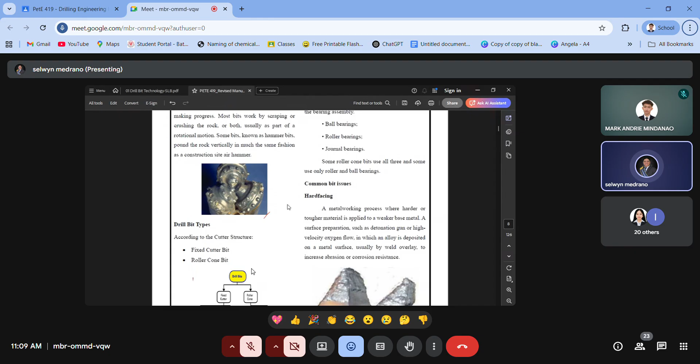So we have here the family tree of the drill bits. I'll be showing you a photo of each type on this tab here, but first I'll ask permission from Sir Arnel.

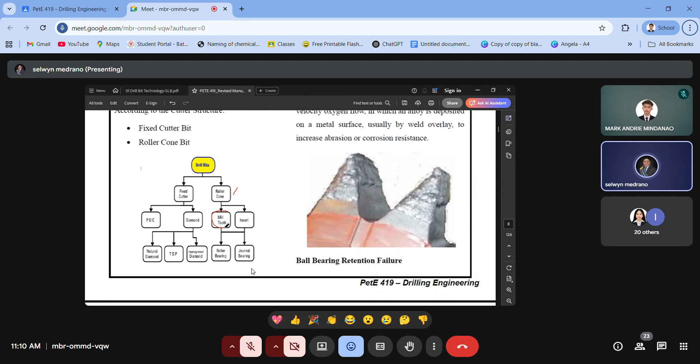I'll be showing you some of the types of drill bits. If you remember from our manual, the first type given in the PowerPoint is a milled tooth bit under roller cone. This is the roller cone classified as milled tooth, and that's what it looks like - you can see there are milled tooths that are triangular in shape.

Then we have here the insert bit, the second type of roller cone. In terms of the structure of its teeth, we have the inserts, which are circular in their physical appearance - circular, unlike the milled tooth, which is triangular in shape.

The material used for these inserts is tungsten carbide, which is technically an inorganic compound - literally tungsten having a reaction with carbon in order to bind and form this particular material.

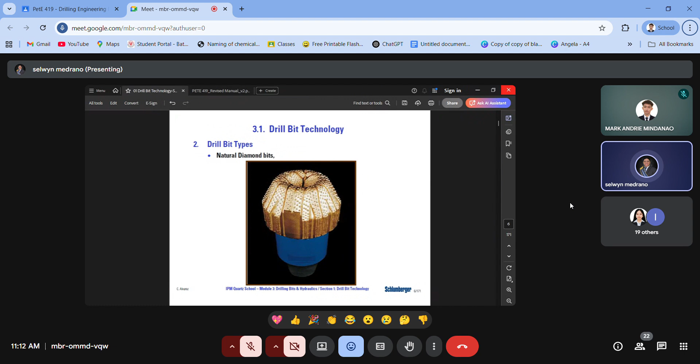Then we're done with the types of roller cone bits. Now we have the first type of fixed cutter bit, and basically for fixed cutter bits, the majority of all the types are made of diamonds.

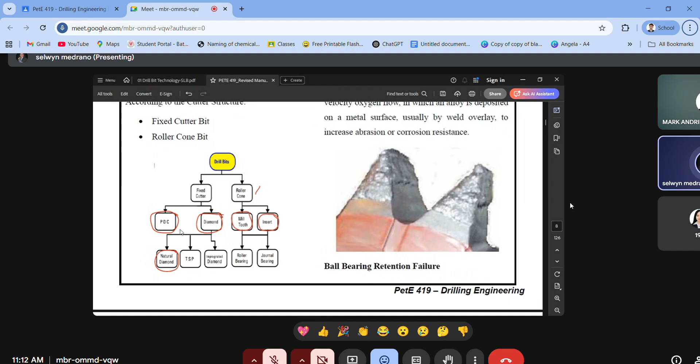The next one we have is the PDC. Under our family tree, PDC is a lone type along with diamond on the second layer of the family. This is the look of the PDC. The acronym PDC means polycrystalline diamond compact bits. As you can see here, the teeth or compacts, the black ones, are not directly facing the formation. It is somehow slanted, its orientation.

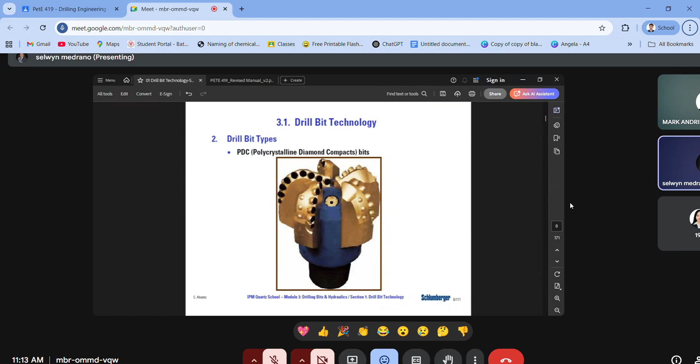What do you mean by HPHT wells? Anyone? What do you mean when we say HPHT wells? Yes, Mark Andrie.

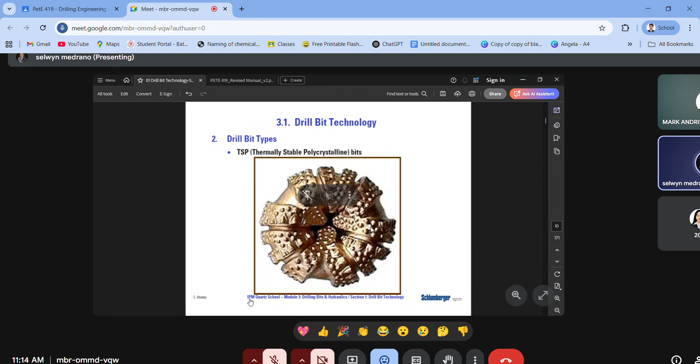From the term high pressure, high temperature wells, these are wells where the pressure and temperature are not common. It's a bit higher compared to normal formations or normal wells. So basically, this particular type of bit is applied to those wells in order for it to withstand the high pressure and high temperature condition in our well. Because if we use a normal type of bit, it can affect the performance of the bit. It can also affect the integrity of the bit, making it more susceptible to wearing or to some types of drilling failure mechanism. Later on we'll be discussing those drilling failure mechanisms.

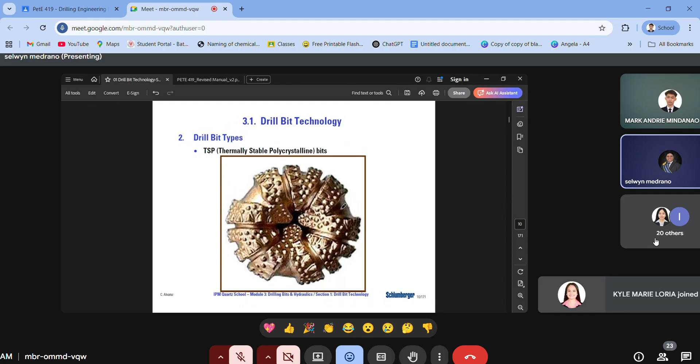Next, this is another perspective of the TSP bits. Then lastly, we have the last type, the impregnated diamond bit. For the impregnated diamond bit, we have this one. If you look at it, its appearance is really different. You can clearly see the differences in their physical attributes or physical structures.

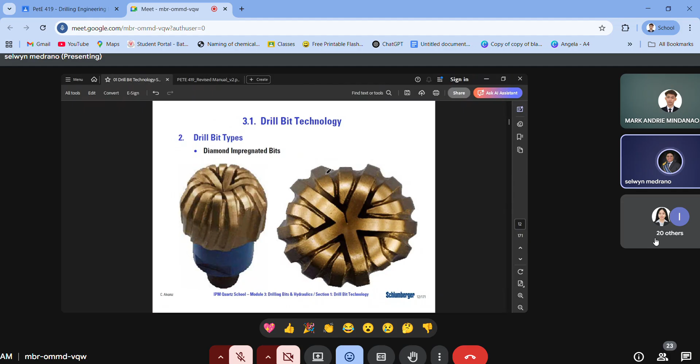So no need to explain further on their differences. These are the families of the bits. One example, for instance, is the PDC bit, which is considered a fixed cutter and also a drill bit. As you can see, you can already tell what type of bit it is in terms of its cutter structure. Okay, let's proceed to our manual.

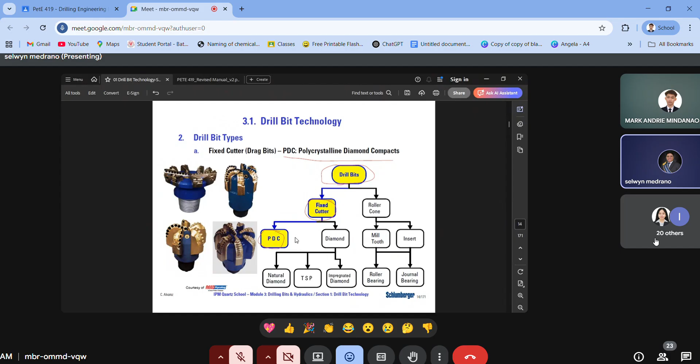Let's go back here and discuss this one. We have here a bearing assembly. What do we mean by bearing assembly? A bearing assembly is a device that sits between the cone and its attachment to the legs of the bit to reduce the force of friction, since our bit is subjected to friction because it is in contact with our formation. So the friction can produce heat.

Large amount of heat, and this heat can affect, as I mentioned earlier, the performance of the bit. Along with drilling fluid or drilling mud—if you could remember during our discussion, I mentioned that one of the purposes of drilling mud is to cool the bit, along with its lubrication or lubricating property. So along with that, along with the bearing assembly and also the drilling mud, these serve the purpose of reducing the friction.

Then in the case of the drilling mud, it is more of a preventive measure, because of course, we can't avoid friction between the bit and the formation. So the tendency is that our drilling mud serves as the absorbent—it absorbs the heat itself. Because in terms of the components of drilling mud, majority, almost every time, it is water-based. And water, we know, has a high specific heat, so it can absorb an immense amount of heat.

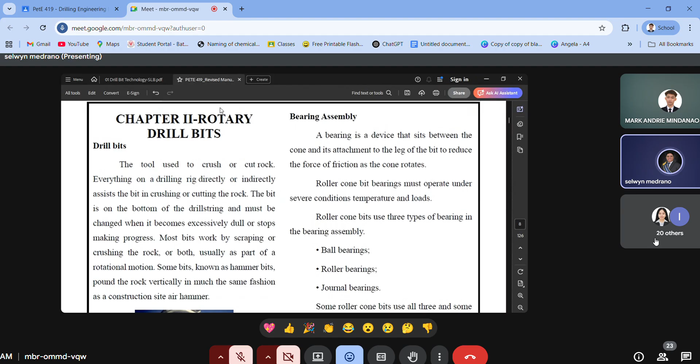Okay, so our roller cones use three types of bearings: ball bearings, roller bearings, and lastly, journal bearings. But in our family tree, you can only see two types, the roller and the journal, because the ball bearing is somehow a subordinate of the roller bearing. Later on, we'll see what the differences are between the two major types, the roller and the journal.

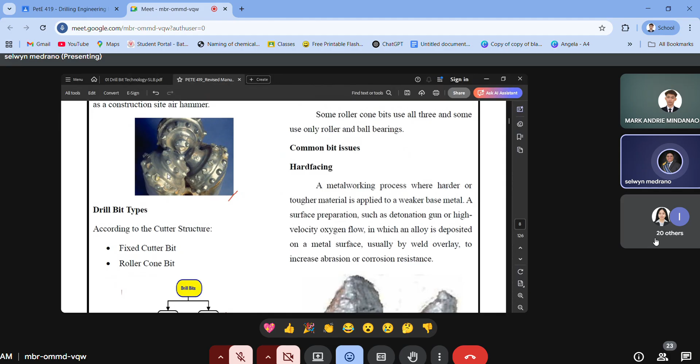For this roller cone type of bits, on the right side of our picture, we have common bit issues that we face during drilling operations. One is the hard facing. So what do we mean by hard facing? Basically, there is a harder material, and since the harder material and the softer material are in contact, the tendency is that the softer material will deteriorate.

So nagkakaroon po siya ng hard facing. Since there is a presence of hard material, for example sa ating case, yung softer material natin, let's say, is the bit, then the harder material is the formation. When we encounter hard formations, ang tendency is magkaroon ng hard facing doon sa ating bit. So nagiging ganyan siya, ito yung itsura niya. One of the possible causes nito, syempre, hindi na-consider yung hard formation dun sa ating reserva.

Actually hindi naman siya maiiwasan kasi since our formation is heterogeneous in general, we are considering only the majority or yung major parts niya, for example, yung ating reserva, karamihan is soft formation naman, however, may mga parts na considered as hard formation. Since in the design of the drill bit, we are to use yung mga bit that is designed for soft formation. Kasi kapag hard formation yung ginamit natin, ang tendency is it can affect or it can slow the drilling. Kasi soft formation, in terms of texture ng formation, sticky po siya. Tendency, it can stick through between the teeth of our bit, so it can slow the drilling, and once the drilling is slowed, yung ating ROP will also be slowed, syempre it can affect the drilling operation time.

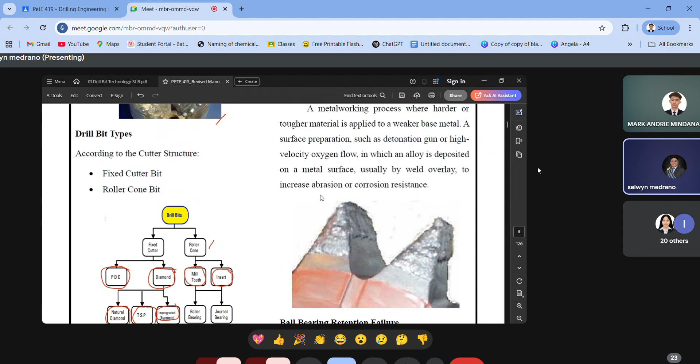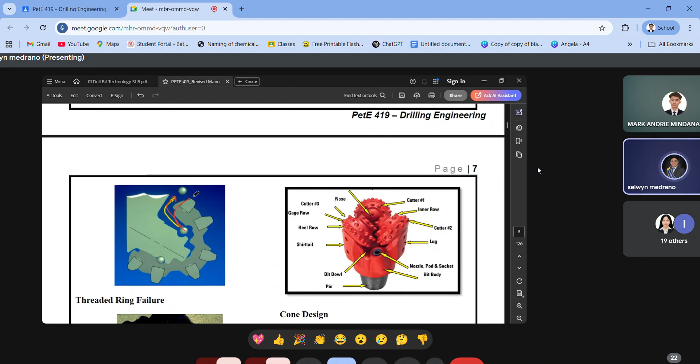Another common bit issue that is encountered is itong ball bearing retention failure. So tendency na aalis yung ball bearing doon sa mismong ano, so yun lang yung simple explanation niya, due to external forces that is acted upon dito sa ating bit.

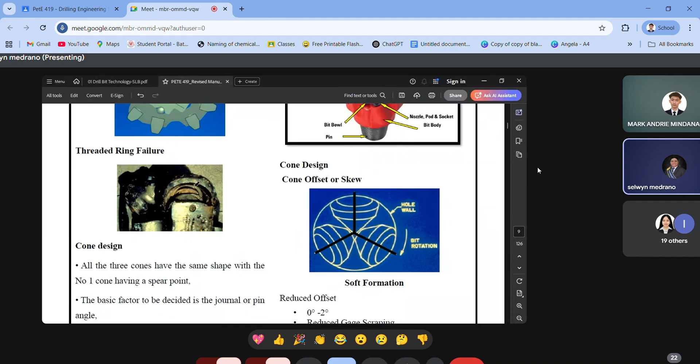Next, we have the threaded ring failure. So yung ating ring, yung ring structure dito, literal na nag-wear siya, napudpud siya, literally, and that causes it to fail.

Okay, for the cone design, yung mahalaga lang naman dito is yung journal angle. Yung journal angle daw po is the angle that is formed between the axis of the journal and the horizontal. So kung yung journal natin is nakaganon, so the horizontal is this one, ito yung angle niya, let's say it is angle theta. Yun nga natin yung journal niya, yung angle niya, let's say yung journal is somehow slanted, so ito yung angle, yung journal angle na tinutukoy.

Okay, for roller cone bits components, we have this one. I won't be specifying each component, kita niyo naman siya sa picture if it's not clear on your module or on your end, so this one is the clearer version of it for you to see.

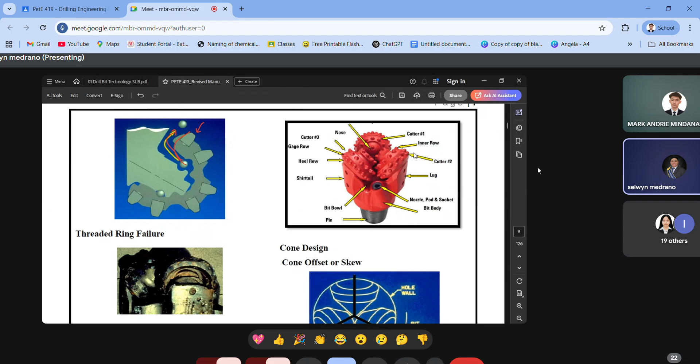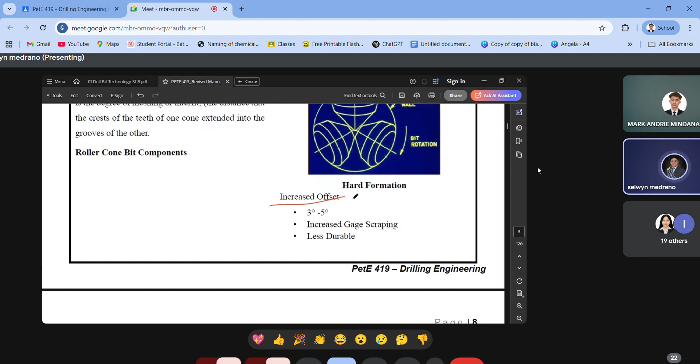Okay, for the cone design, we have a reduced offset and increased offset. This reduced offset is basically applied for soft formation, and this increased offset, wherein yung offset po natin is 3 to 5 degrees, is applied for hard formation. Now, based on the given description here, as you can see, syempre for reduced offset, somehow it is more durable since it is designed for soft formation, however, in terms of the pacing of the drilling operation, it is slower.

Bakit? Kasi since it is soft formation, malambot yung formation natin, in terms of the texture or yung mismong physical attributes ng ating formation, siya ay malambot or sticky in nature, so ang tendency, it can reduce the speed or the rotary speed of the bit, which causes it to slow the drilling operation.

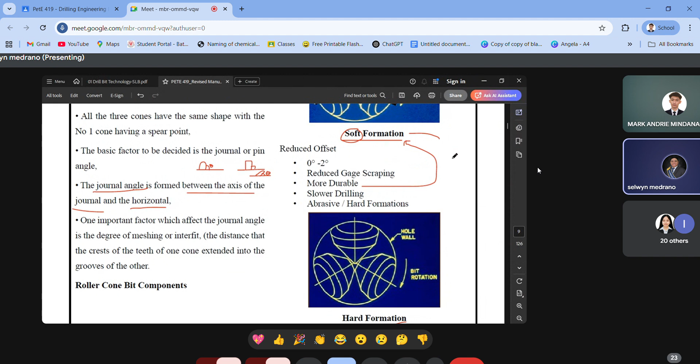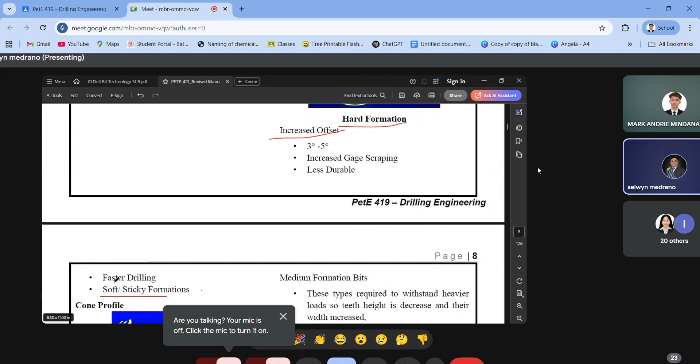Okay, why is it ano for... but baliktad? I think this is baliktad pala. In terms din naman sa increased offset, baliktad lang ito kasi this one is for the soft. Increased offset, ito yung sa soft and sticky, faster drilling po siya, however, less durable. Ang nangyayari, there is... wait, I can't think of the right term for that. Ang nangyayari, kaya siya nagiging less durable, syempre.

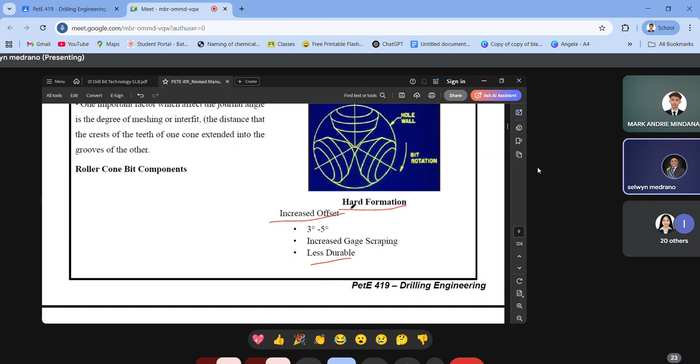Yung mga soft formation, are you familiar with conglomerate? Yung conglomerate, in a soft version, siya ay merong mga foreign material that is present on that particular formation, and syempre, yung mga foreign materials na yun, generally yung material na nagse-sement doon sa mga foreign materials is soft in nature, but yung mga material itself, sila po ay hard. So ang tendency, mas maraming harder materials, but in terms of its size is smaller, mas maraming na-encounter na ganun.

So, the tendency is the bit becomes less durable because they've encountered more of those types of materials - the small, hard ones. But generally, it is soft formation. There are just some small materials present in the formation.

Okay, for the cone profile, we have here the round and the flat cone profile. Later on, in the IADC bit classification or our nomenclature for bits, we'll be discussing this one - the round and the flat cone profile.

For flat cone profile, basically it is more applicable on hard and abrasive formations. And of course, with hard and abrasive formation, the drilling pace is slower, but it is more durable.

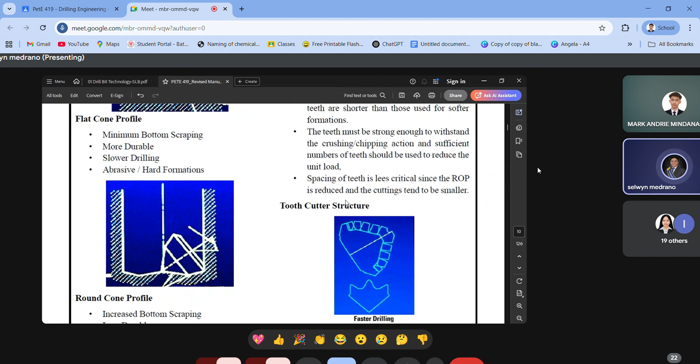But on the other end, we have the round cone formation profile. This one is designed for soft and sticky formation. Since it is soft and sticky formation, it could be less durable. However, it can drill at a fast rate.

Okay, we have here the cutting structure. For the cutting structure, we identify our formation into three in terms of hardness - soft, medium, and hard. This medium is pertaining to the hardness, not the size. Since we classify formation into three, we also classify the bits designed for those specific types of formation into three as well.

So we have bits designed for soft formation, bits designed for medium formation, and bits designed for hard formation.

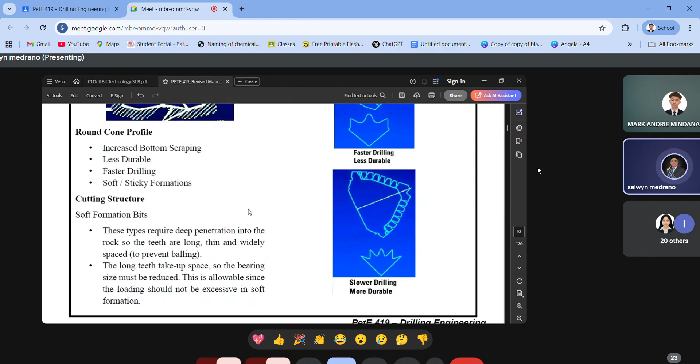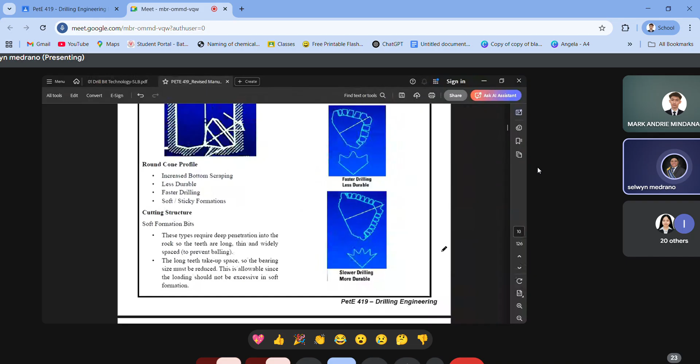Okay, in terms of the tooth cutter structure, can someone give me a conclusion with regards to this image here, our two images? I'll be calling from the index card. Is Cyril here? What can you infer from this particular image on the right side of our presentation?

Where is Cyril? Hello, sir. What can you infer from this particular image or diagram? About this tooth cutter structure, sir.

Okay, what can you say about it in terms of - isn't there a description written below each photo?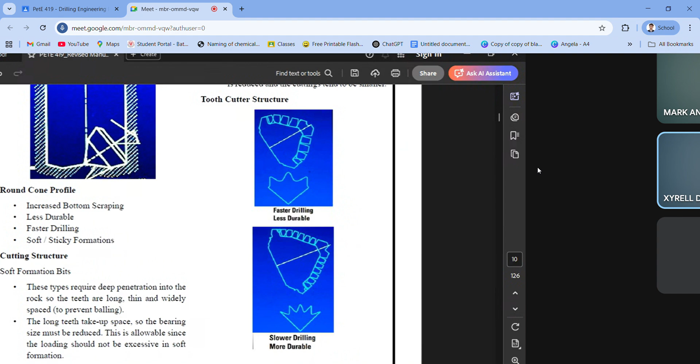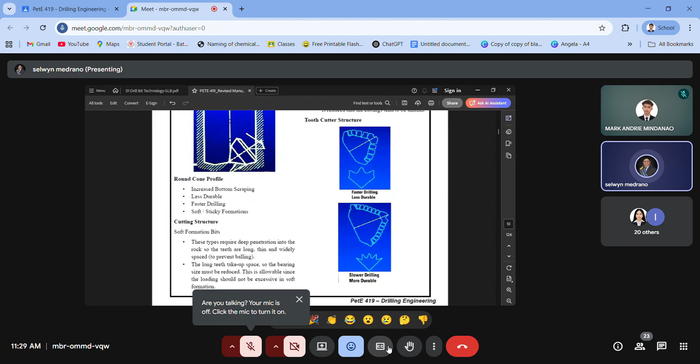Okay, so what Cyril said is more of an input. I need a conclusion with regards to Cyril's input. He already mentioned the obvious there. Let's have Aina Nicole.

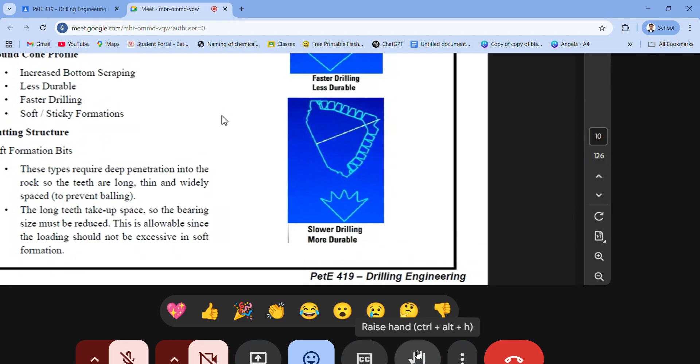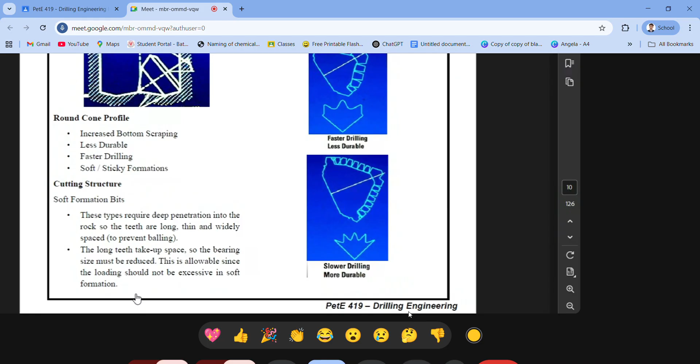Can anyone help Aina? Yes, Sophia.

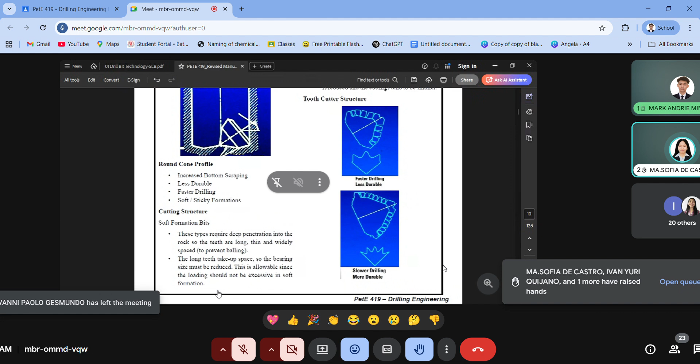Sir, based on what Cyril said, the tip is longer then sharper, then pointed, based also on the picture. So this allows it to have faster penetration. Then the sharp tip tends to wear or break more easily when drilling formation.

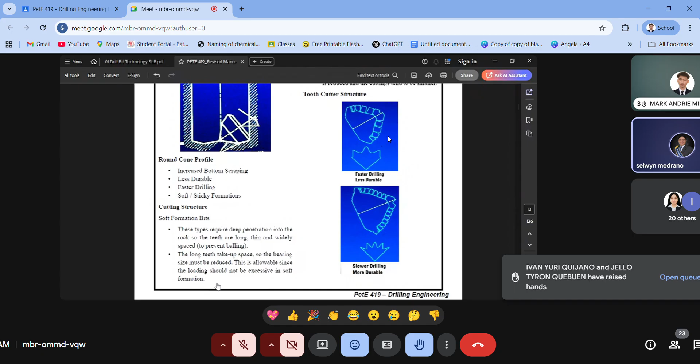Okay, thank you. So basically, as you can see, the more teeth present in terms of the frequency or quantity of teeth on the bit, it is more designed for more durable or harder formations. However, the pacing could be slow.

On the other hand, we have here a figure wherein the frequency or number of teeth is somehow smaller compared to this one. This particular type of bit with less teeth is designed for less durable formation, or in terms of being soft. However, it is more of faster drilling. Okay? Do you get the difference between the two?

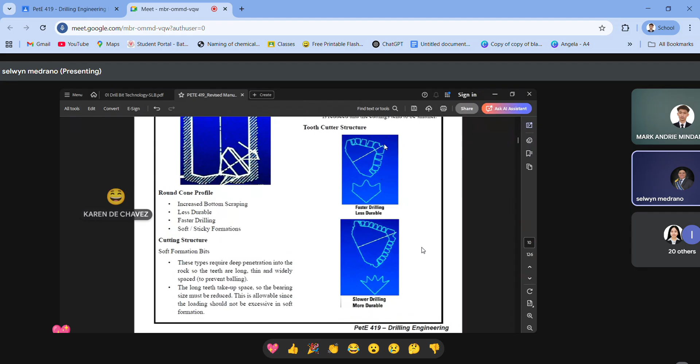Okay, so as you can see here, we have a comparison in the number of teeth on the bit. What specific type of bit is this? Based on what I have shown you earlier, I have shown you all the types of the bit. What type of bit is present here in our image?

Of course, it is a roller cone. So what is it - insert bit or milled tooth? Yes, Maria Luisa. Milled, sir. Okay, so this one is a milled tooth bit - basically, it's under roller cone.

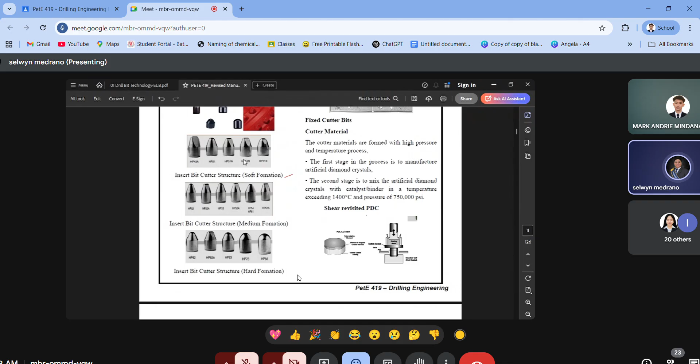Yung difference po niya, syempre, pag soft ng formation, pag haba, as you can see, medyo mahaba siya or medyo mapayat siya in terms of its diameter. Then kapag harder formation, medyo ponggok siya or maliit, then medyo wide siya in terms of the diameter, mataas yung diameter po niya. Okay, we're done with the two.

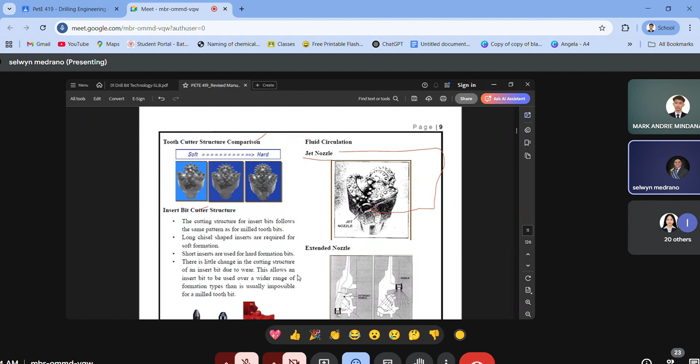Roller cone. Then we have here the jet nozzle placement for the roller cone. So the jet nozzle placement for the fluid circulation is here. Ito siya, ito yung location po niya. However, there are some bits that are designed with extended nozzle.

So what do we mean by extended nozzle? Diba, normally, dito nakikita yung ating nozzle. But yung extended nozzle, it is directly adjacent with the formation. So siya ay directly facing the formation.

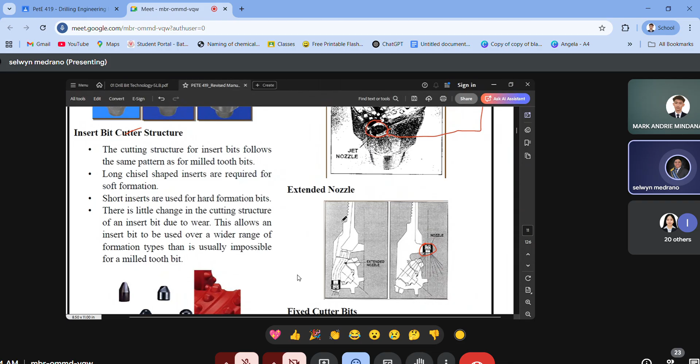So para saan ba yung nozzle na yan? Dyan po lumalabas yung ating drilling fluid and the drilling na ating nilalagay doon, finifill doon sa ating annulus or sa borehole. Okay po, clear yun?

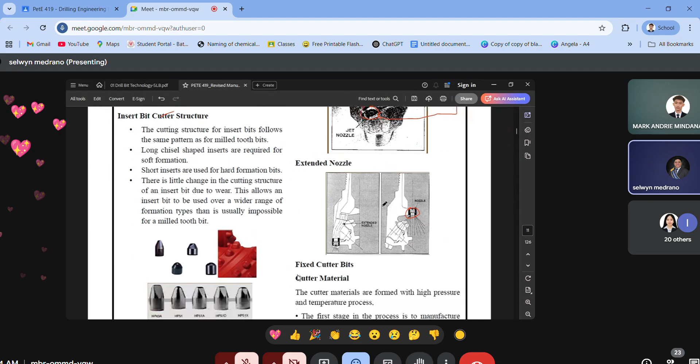Guys, with regards sa roller cone, do you have any questions? Okay, let's proceed with fixed cutter bits.

Okay, for the cutter materials, for this particular type of bit, are formed with high pressure and temperature process. So technically, these are formed, kumbaga, minomold po yung shape po niya in subject with high pressure and high temperature. So technically, these are mostly metals, and some of the materials that is being used for this particular type of bit ay inorganic in nature.

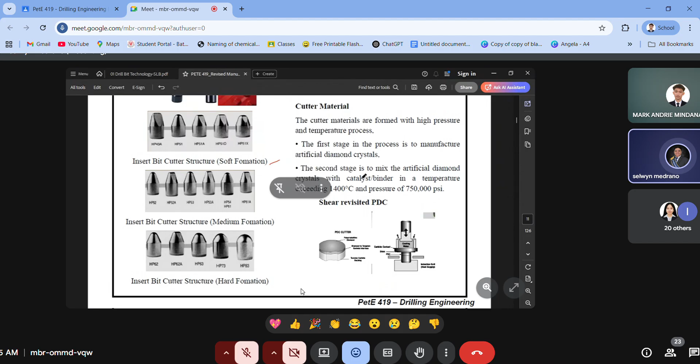So literal na nagkakaroon ng artificial making of these diamond crystals. Kasi if you could remember, yung atin pong fixed cutter bit, yung kanya pong material is diamond in nature. So in terms of the artificial diamond crystals, these are yung tinatawag nating synthetic diamonds. So we have here a shear revisited PDC, or polycrystalline diamond compact.

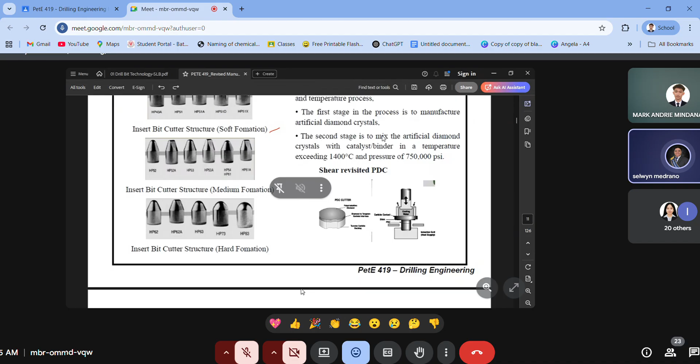So ito yung itsura po niya. And as you can see, it is in the form of different diameter. So iba-iba yung kanyang kapal in terms of the diameter.

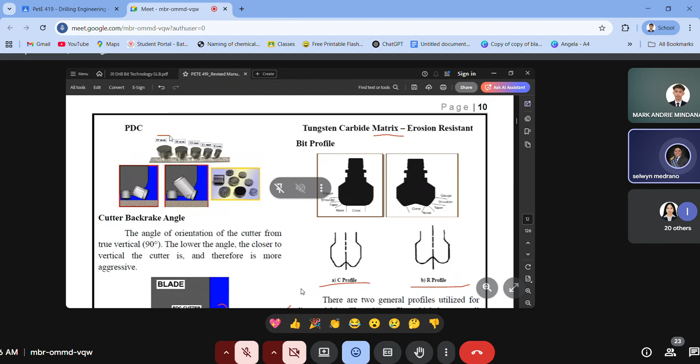And as you can see here, we are to consider the cutter back rake angle. Okay, for the cutter back rake angle, this is the angle of orientation of the cutter from the true vertical. So basically, the true vertical is this one. Hindi ko pala naalis yan.

And as you can see, the cutter back rake angle can be computed or quantified if yung ating PDC cutter is facing to the right, yung atin pong angle is quantified clockwise. So clockwise po yan. So from the true vertical, clockwise, i-measure natin siya clockwise. Yun yung cutter back rake angle natin, or the gamma.

And if it is facing to the left, just like this one, diba this is facing to the left, yung atin pong measurement ng cutter back rake angle from the true vertical is counter clockwise. Clear po? Ba't pala nang naka-open ng camera? Clear po iyon?

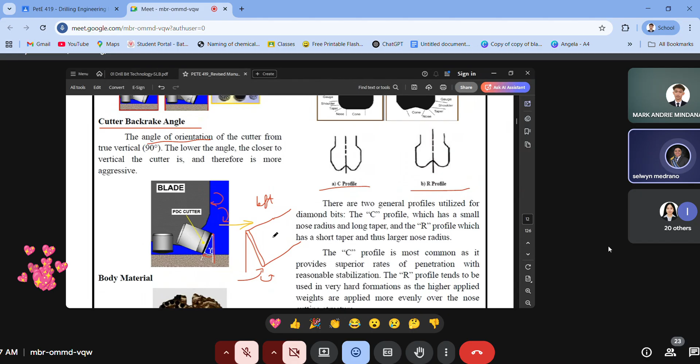Okay, so in terms naman po of the body material, yan. If you could remember, the IADC bit classification under drilling technology, di ba you have taken it last year? Yung code that is allotted for a fixed cutter bit is composed of alphanumerical code. The first one is the alphabetical element, then the last three is all numerical in terms of its element. So yung ating alphabetical part for the fixed cutter, dalawa lang siya, it's either M or S. So it could be steel or it could be matrix in nature.

Okay, so steel, so siya ay more of metal. Then in terms of matrix, more of ano siya, inorganic compound. So we have here again, ito yung types of matrix, yung tungsten carbide, one of the type of the matrix. So we have here the bit profile.

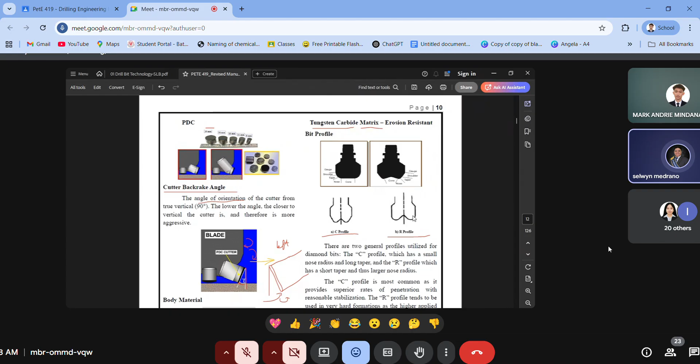Actually, I cannot see the difference between these two doon sa C and R. I mean, in terms of its relationship with the alphabetical, or yung mismong letter na dedicated for each profile. Cannot see kung bakit siya naging C. I cannot see kung bakit ito naging R. But there are still difference, no, in terms of the profile. And syempre, meron niyang effect doon sa ating drilling.

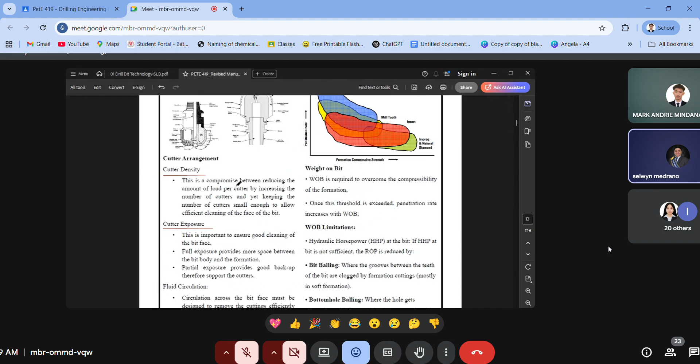Then we have here the cutter arrangement. For the cutter arrangement, it is subdivided into 3. So the first one is the cutter density. Then we have the cutter exposure. For cutter density, if you would remember, this one is yung parameter na ginamit natin upon dealing with the calculations under this one, diba, if you could remember.

Then for cutter exposure, more of yung exposure po niya with the formation, depending on the angle, and how, yung in terms of the surface area that is somehow adjacent with the formation. Then we have the fluid circulation. So for fluid circulation, ito naman ay paulit-ulit na natin sinasabi, yung interference ng ating drilling fluid and drilling mud with our drilling bit. So most probably, there is kumbaga, there is an effect in terms of its mechanism.

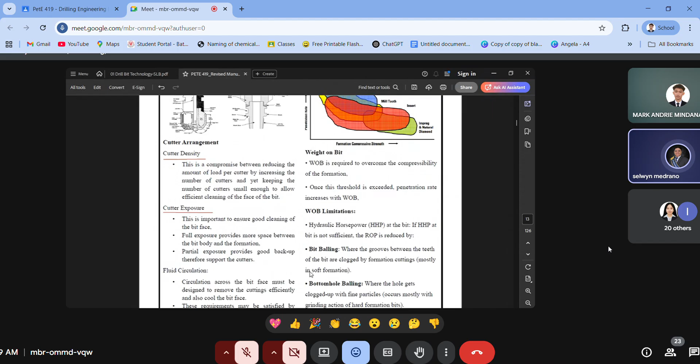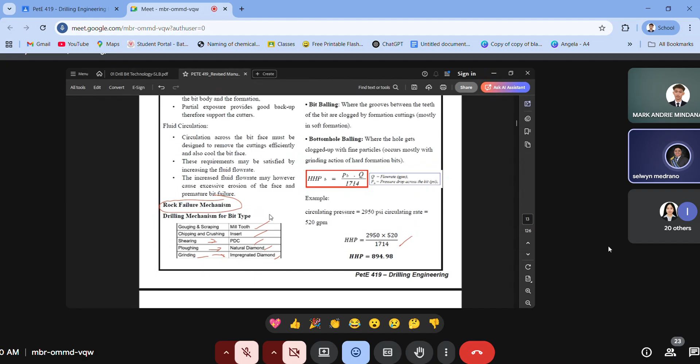Okay, then lastly, we have here the rock failure mechanism that I mentioned to you earlier. So we have different rock failure mechanisms for each type of bit. I won't go through each one individually, but we have ploughing for natural diamond, for PDC shearing, and so on. The PDC is shearing because, if you remember, the PDC is somehow slanted, and shearing forces are more of the forces meeting each other. In terms of the relationship between the formation and the bit, it creates a shearing force or shearing mechanism.

Then we have here the bit application spectrum. I would like to ask some of your insights about this particular graph relating penetration rate and the formation compressive strength. Let me call on Giovanni. What can you say about this bit application spectrum?

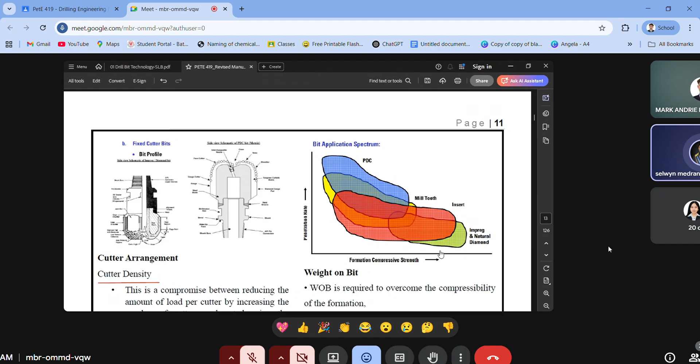Okay, where is Giovanni? What can you say about this particular graph relating the penetration rate, the formation compressive strength, and also the type of the bit?

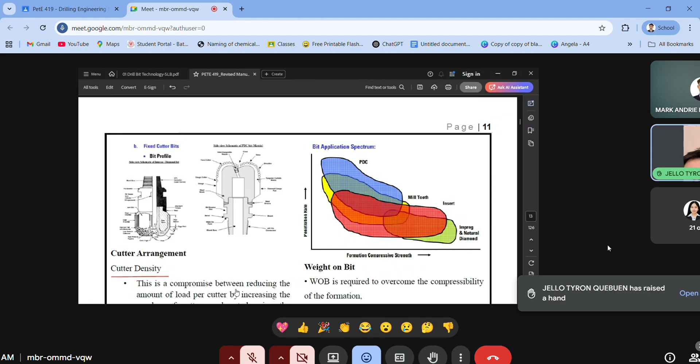Yes, Jello. Audible naman po, sir, yes. I'd like to add to what Mr. Gismundo said. Let me highlight the colored regions in the graph: the PDC, mill tooth, insert, and the impregnated natural diamond. Those regions represent where each of these bits is best utilized.

For example, the PDC has a high penetration rate but a lower formation compressive strength, meaning it is best for soft to medium formations. Then for the impregnated and diamond bits, since they are at the highest point of compressive strength but lower penetration rate, they are good for very hard formations.

Okay, thank you for that insight. That is the specific insight I was looking forward for you to notice. But on a general note, as you can see, the relationship between the penetration rate and also the formation compressive strength has an inverse relationship. You can already see that there is an inverse relationship. What do I mean by this inverse relationship?

As you can see, regardless of the type of bit we use, as the bit is designed for a harder formation, meaning as the formation compressive strength increases or the formation gets harder, the penetration rate becomes somehow limited or lower in ROP. On the other end, this PDC is only designed for soft formation, but in terms of penetration rate, it is high. Do you get the inverse relationship between these two?

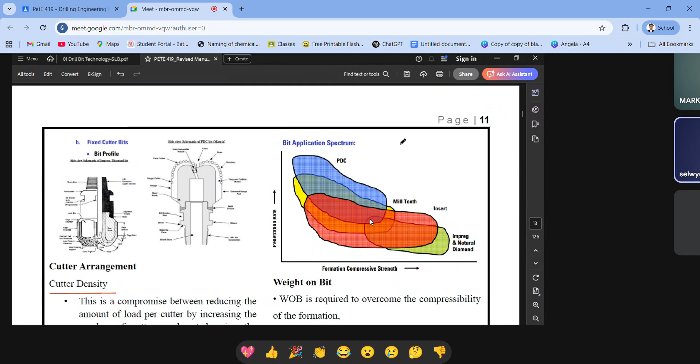So, along with these parameters, we also have weight on bit, which I have already discussed with you. Weight on bit is required to overcome the compressibility of the formation, because if not, the tendency is that the teeth will wear out. In terms of the compressibility of the formation, our bit's weight on bit, rotary speed, and rate of penetration in general will withstand the compressibility, or should be higher than its compressibility in order for it to be crushed. Once this threshold is exceeded, the penetration rate increases with the weight on bit, so there is a direct relationship between ROP and WOB.

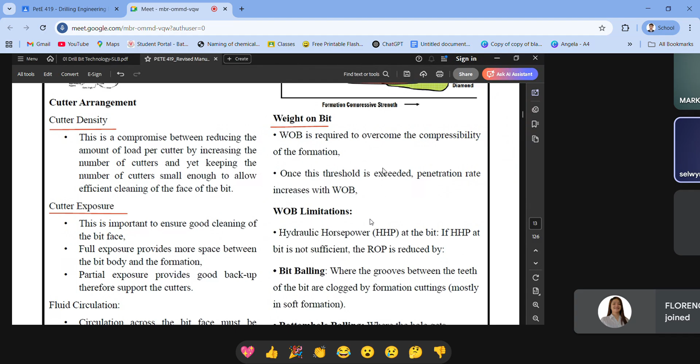However, there is a limitation in terms of the HHP, or hydraulic horsepower, of our bit, which we have already discussed. If our HHP is not sufficient or is a bit low, our ROP is reduced. Meaning, when the ROP is low, it will require us more time to drill a particular formation, and this will lead us to a conclusion that our operation becomes costly because it takes longer to drill.

So, along with that, when our ROP is reduced, what are the causes? We have two possible causes: the first one is bit balling, and the second one is bottom hole balling. So what is the difference between these two?

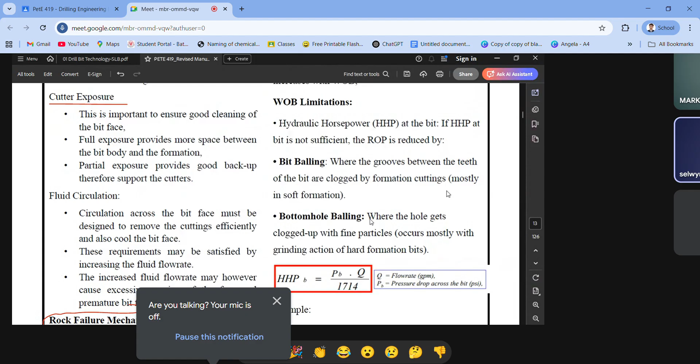For bottom hole balling, if the formation is hard in terms of hardness, its particles are fine in nature. One example is shale, which is considered one of the hard formations, and shale's particles are fine. When shale is crushed by our bit, these fine particles tend to clog our hole, creating a hindrance which will require us to increase the rotary speed in order to maintain our ROP, since there is hindrance in our formation. Is that clear? The difference between bit balling and bottom hole balling.

Okay, so we have also discussed this HHP. Now let's proceed with the IADC bit classification.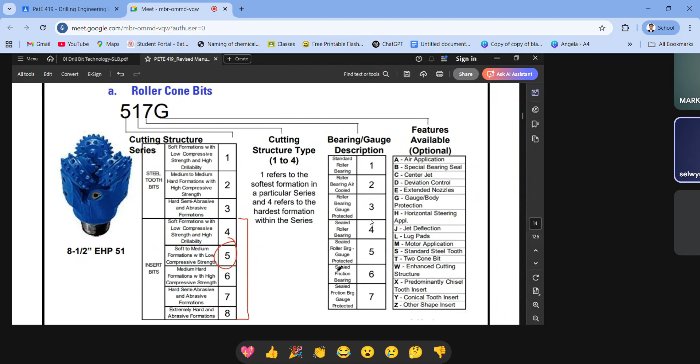I haven't erased what we used earlier, I used it in O1. Okay, we have the roller cone bit, so first, for the nomenclature of the roller cone bit. The first thing we notice here is that the numerical element comes before the alphabetical element. So the first three elements of our code are numerical in nature, and the last one is alphabetical in nature. Our first numerical element pertains to the cutting structure series.

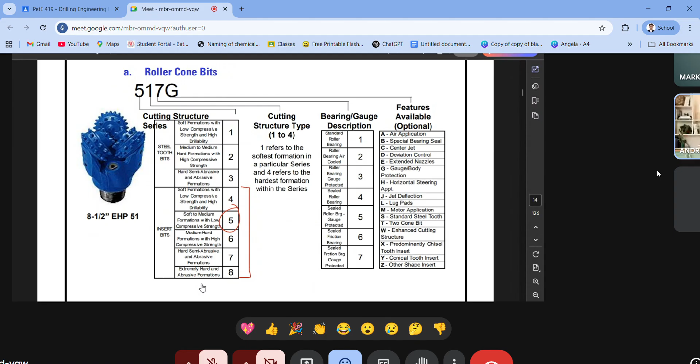This is just a review since you have already discussed this in drilling technology. May I call on Miss Bourbon? What does the 5 in our code mean? Andrea Lynn, is Miss Andrea Lynn here? Yes, sir. For the 5, in the first position, the meaning is that it is an insert bit, for soft to medium formation with low compressive strength.

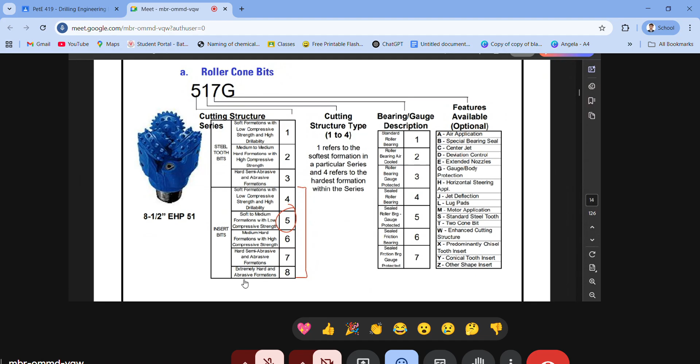Next, let's have... do you have any question with the roller cone bits po? If you don't have any question, kindly give me some response for me to proceed. Okay, so I assume na wala na kayong question. Let's proceed po with the fixed cutter bits.

Okay, for fixed cutter bits, just like what I have mentioned earlier, yung ating code, mauuna yung alphabetical kaysa doon sa kanyang numerical values. Doon sa alphabetical value ng ating code, it is only either M or S, or matrix or steel body. So nabanggit ko na yung about sa M or S. So basically this is M, so matrix body po siya.

Possibly tungsten carbide. Okay, then in terms of the numerical values, the first numerical value, which is 4, ano pong ini-indicate niya? Let's have... sabi mo stop. Natawag na siya ulit. Let's have Hazel. Hazel, ano daw po ang ibig sabihin ng number 4 dito sa M432?

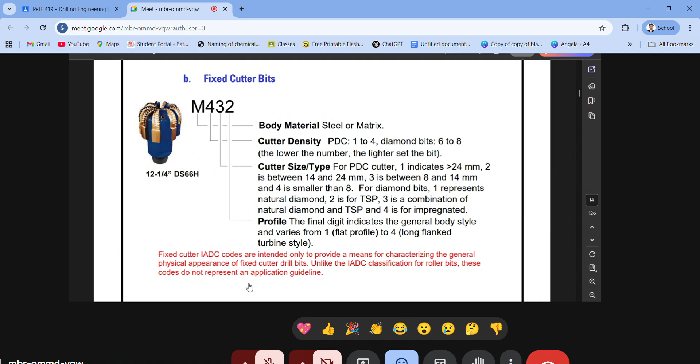Dito ba si Hazel? Ano yung meaning ng 4, Hazel? Yung 4 po ay yung cutter density, which is, yung PDC po niya ay 1 to 4, yung diamond bits po ay 6 to 8. Okay, so yung number 4, siya is pertaining sa cutter density.

So in terms of cutter density, syempre identify po muna natin kung siya po ay PDC or kung siya ay diamond bits. Yung diamond bits, it could be TSP, it could be natural diamond, and it could be the impregnated diamond. So since number 4 po siya, classified po siya as PDC. And in terms of the numerical value, it is stated here that the lower the number, the lighter the set of the bit. And since number 4 po siya, siya yung pinakamabigat doon sa series. Okay, so mabigat po or heavyweight PDC po, iyan. Clear po yun?

Clear. Okay, let's have the number 3. Let's call Enriquez. Ano ibig sabihin ng number 3? Yung sa number 3 po, yun po yung nag-i-indicate po ng cutter size or type.

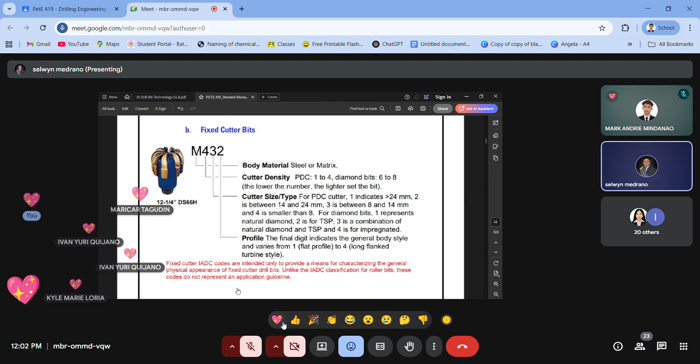Okay po, so yun. Do you have any questions with regards po sa IADC drill bit classification? Question? Okay, so if you don't have any question, let's proceed to the next one.

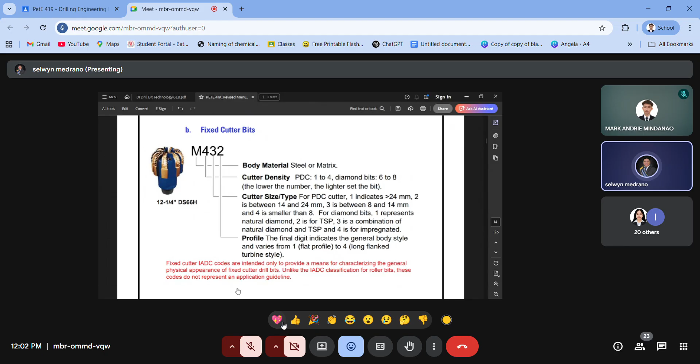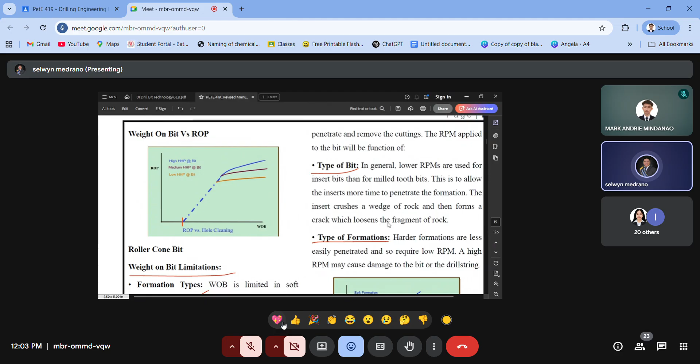Okay, so we have here the graph, another graph again, that shows the relationship between the weight on bit and the ROP. Siyempre, you can already see that there is a direct relationship with weight on bit and ROP. What do I mean by direct relationship? Pagtaas ng ating weight on bit, disregarding its HHP or the hydraulic horsepower, is pagtaas din po ng ating ROP. Okay, so yun po yung ibig sabihin na siya ay mayroong direct relationship with one another.

Then, in terms of the roller cone bit, there is a WOB limitation. So, it could be limited by these factors: we have the formation types, hole deviation, bearing type, bearing life, and tooth life. Basically, hindi ko na siya kailangan i-explain, yan naman po ay self-explanatory kung bakit yan nakaka-apekto doon sa ating weight on bit. And actually, yung weight on bit, nakaka-apekto din siya sa bearing life and tooth life.

Diga, we have already discussed it last time when one of your classmates asked about kung ano yung mga parameters na nakaka-apekto for the bearing life and also for the tooth life.

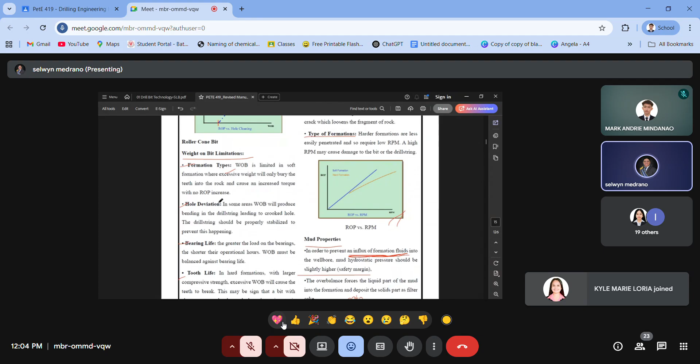Okay? Siyempre, sa hole deviation naman, ito naman ay given na itong formation type. Itong hole deviation, siyempre, kapag, let's say, slightly tilted yung ating formation or siya po ay deviated, ang tendency, mag-iiba yung forces. If you could remember yung basic principles sa statics of rigid bodies or sa engineering mechanics na lang, sabihin na natin engineering mechanics. Siyempre, pag inclined po yan by a certain angle, tendency, nagbabago yung kanyang force, diga. So technically, this one is somehow analogous with such condition. Clear po iyon? Clear po?

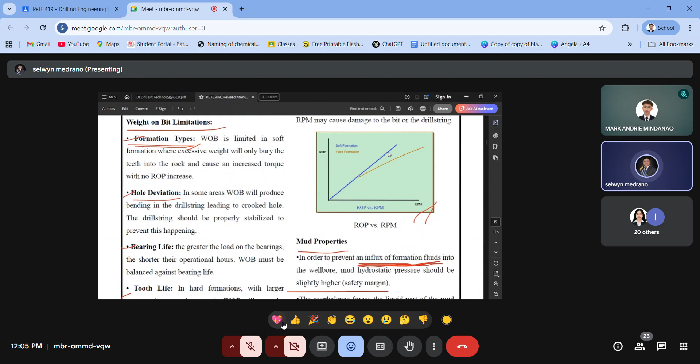Okay, so syempre, we have here the ROP versus RPM or the rotary speed. Syempre, you can already see that there is also a direct relationship with one another. Then for the mud properties, we have here this one.

Yung first statement states that in order to prevent an influx of formation fluid, so ito naka-highlight, galit na galit yung underline. Ano ba yung term natin for the influx of formation fluids into the borehole or the well bore? Ano yung term na ginagamit natin? Let's have Maricar, ano yung term na ginagamit natin dyan? Yung one word lang.

Good afternoon po, sir. Yun nga po, sir, yung kick po. Okay, so basically that is the kick, correct. So this kick, in order for us to prevent the kick, yung ating hydrostatic pressure daw should be slightly higher with saan?

Slightly higher siya saan? Is it pertaining to the atmospheric pressure? Is it pertaining to the bottom hole? Saan? Saan daw siya dapat mas mataas? Yung ating hydrostatic pressure para ma-prevent natin ang kick. Other hands.

Let's have... parang lahat ng tawag ko na. Let's have, hindi pala, ang tawag ko na din pala to. Let's have Joanna. This is Joanna. Saan daw dapat mas mataas or slightly higher yung ating hydrostatic pressure para maiwasan natin ang kick?

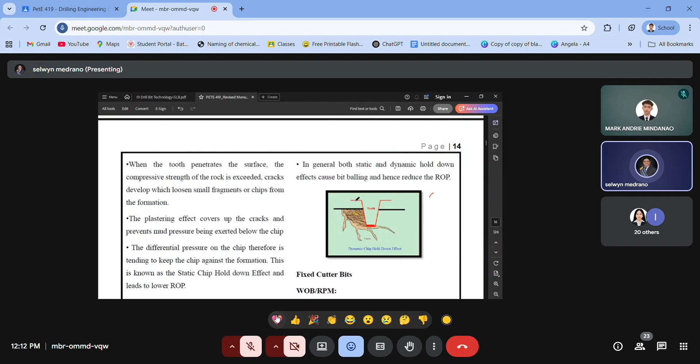Okay. So, ito namang details ng mga ganito, we'll be discussing this one in Drilling Hydraulics, Chapter 4, so before pa din siya mag-midterms. So, yun, I think yun lang naman. Ito naman ay more of the specific na. So, lahat naman itong nasa baba na ay na-discuss na po natin during our meeting, no?